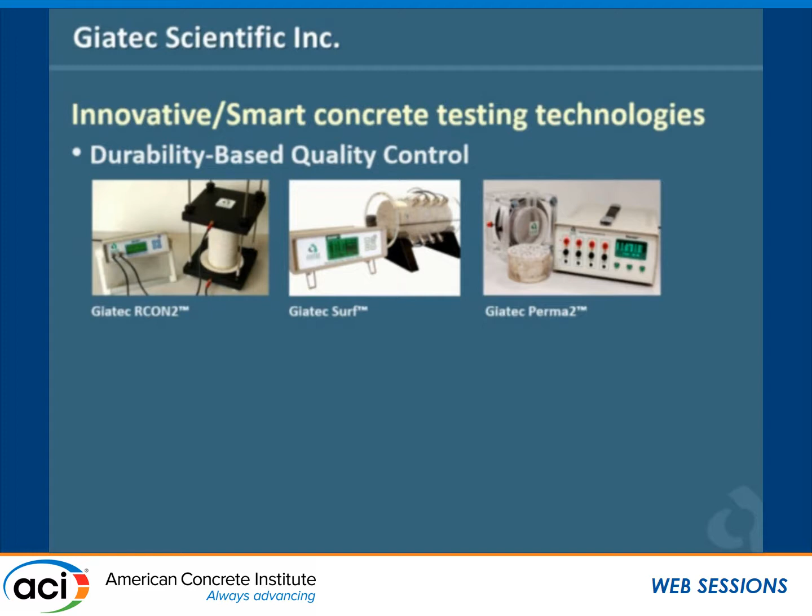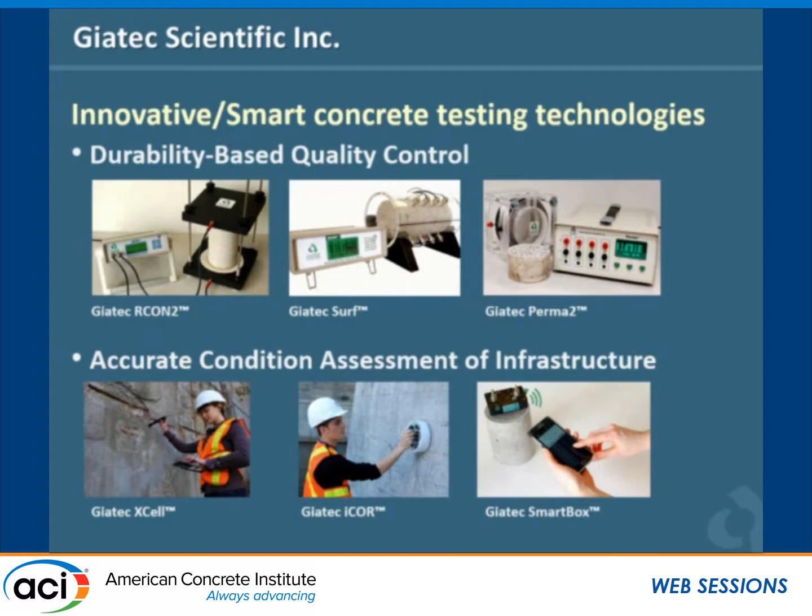And it's very archaic. Nowadays, with the advancements in mobile technologies, you can get much more powerful technology on a smartphone, better graphics, more accessibility, and more data communication. So with the second type of device that we developed, we focus on wireless communication between the measurement tool and the mobile app. So we started to develop mobile apps for corrosion detection and various types of activities, such as resistivity measurement. So essentially, we don't have any display on the unit, and everything is done and displayed on the mobile app. But the presentation is about on-site measurement of concrete properties, so I'll go into another application we're working on.

So by a raise of hands, how many of you have searched for concrete in Google Play or App Store? There's one. Okay, yeah. So if you search for just the keyword concrete, you'll find thousands of apps. There's literally thousands of apps on the App Store and Google Play. Anything from a concrete calculator, and I didn't know what a concrete calculator is until I downloaded one, and it's essentially a volume calculator. So any kid out of high school can do that, and then it estimates how many bags of concrete you need to put in that space.

And there are also apps, as you showed in the previous presentation, for simplified design of concrete elements. And there are also apps for general knowledge, like basic civil engineering concepts and definitions, dictionaries, and things like that. So this shows that it's so simple to develop applications and make them available to millions and millions of people worldwide. And so this is a tool that is available to leverage, and why not use it in the construction industry.

So our focus has been essentially on bringing mobile-based technologies, and we refer to them as IoT solutions. IoT stands for Internet of Things, and that's a very common keyword in the IT sector. Essentially, you want to connect everything together to the internet. So smart homes, smart TVs, smart fridges that can tweet what you need to do in the shopping, things like that. And we wanted to bring IoT applications to the construction sector. And the first focus was on compressive strength. So this is what I'm going to focus on in the presentation and show how we can leverage mobile technologies to monitor compressive strength of concrete in situ.

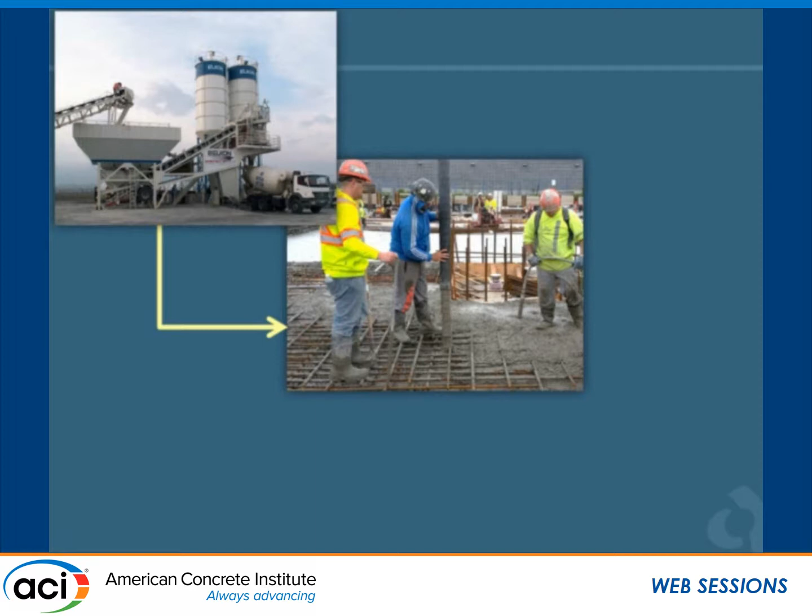So as you're familiar, the process of concrete construction involves bringing concrete to the job site using a ready-mix producer's truck, and pouring concrete. You take cylindrical specimens for general quality control, but you also have specimens that are cured in the field and sent to the lab for field-cured specimen strength measurement. And that has a very practical application, which is essentially formwork removal, application of load on the structure, opening traffic on a highway or concrete pavement, repairs, turning off the heat when you're doing element curing. So you send those specimens to the lab at 1 day, 2 days, 3 days, and then you wait for the results from the lab, and then you can make a decision on what you're going to do next.

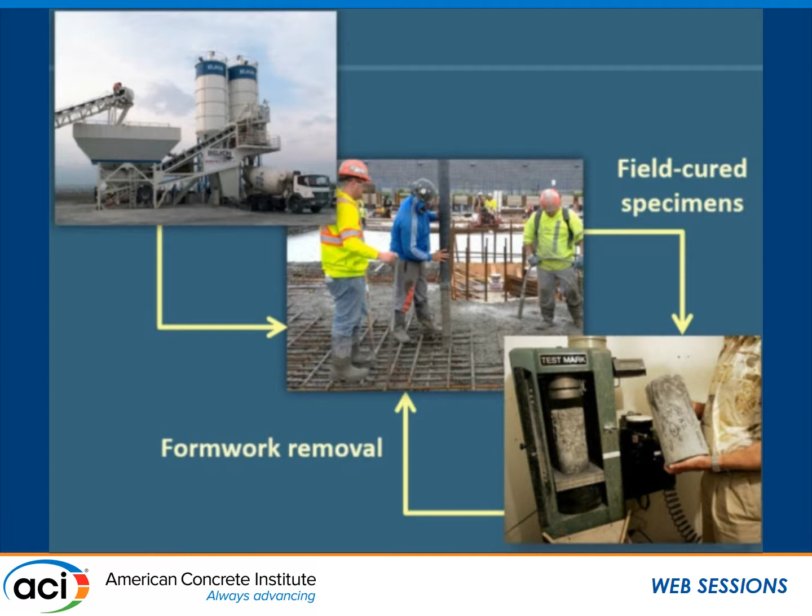So that's the process, and it's delayed, as you know, and it's not that accurate because you can't have that many field-cured specimens. So there are other non-destructive test methods, as you're familiar, such as the pull-out test and the Schmidt hammer, and those are not adopted that well because of the high variability of the results. So the most adopted technology out there for real-time concrete strength measurement is maturity. Maturity is standardized by ASTM, and it's been adopted by almost all the DOTs.

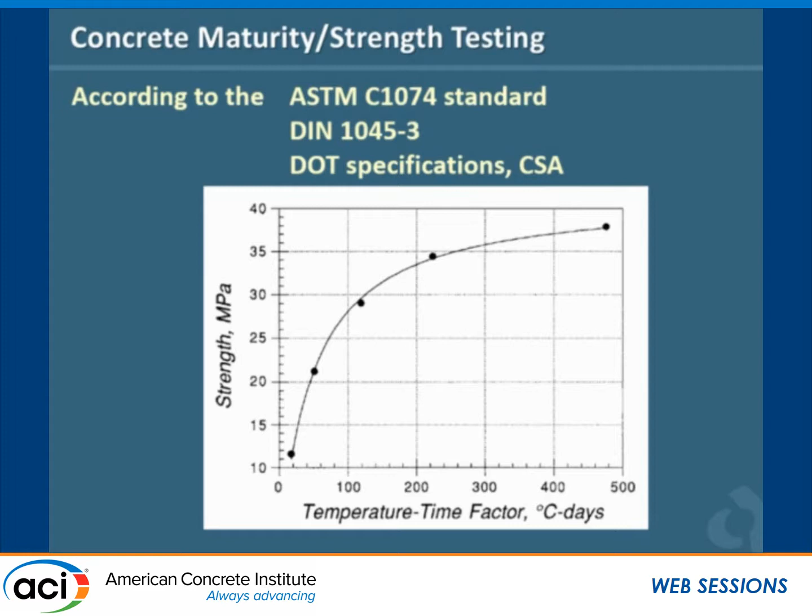It's part of the building code in Canada. It actually clearly states that you can either do the break test or you can do the maturity. So for maturity, you develop a calibration curve that essentially correlates between the temperature profile of concrete and the strengths of concrete at different days. And then use that pre-calibration curve, go on the field, monitor the temperature of the concrete in the field, and then you can estimate the strengths in real time.

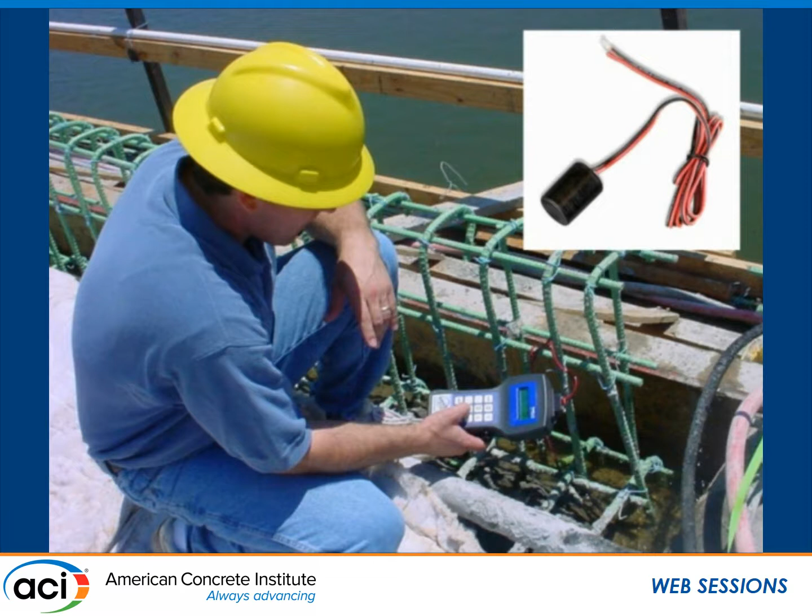The way that people do it is that you have thermocouples, temperature sensors, wire temperature sensors essentially, that you put in the concrete, take the wire out, and then at any point in time you go plug in your data logger to the wire to collect information. And then you have to sort of analyze the data to see on the curve where you are and then estimate the strengths.

So the process, as I said, is simple. Just place temperature sensors in the concrete, obtain data, which is essentially the temperature data. Then area underneath the temperature profile gives you the maturity index. And then from the calibration, you can see what is the strengths. There are two equations in the ASTM C1074 for maturity calculation. One is Nurse-Saul equation, one Arrhenius equation. There's a European standard for maturity, which is called weighted maturity, which is popular in Denmark, Netherlands, Scandinavian countries. So all in all, this gives us sort of an accurate measurement as a replacement of field-cured specimens to test.

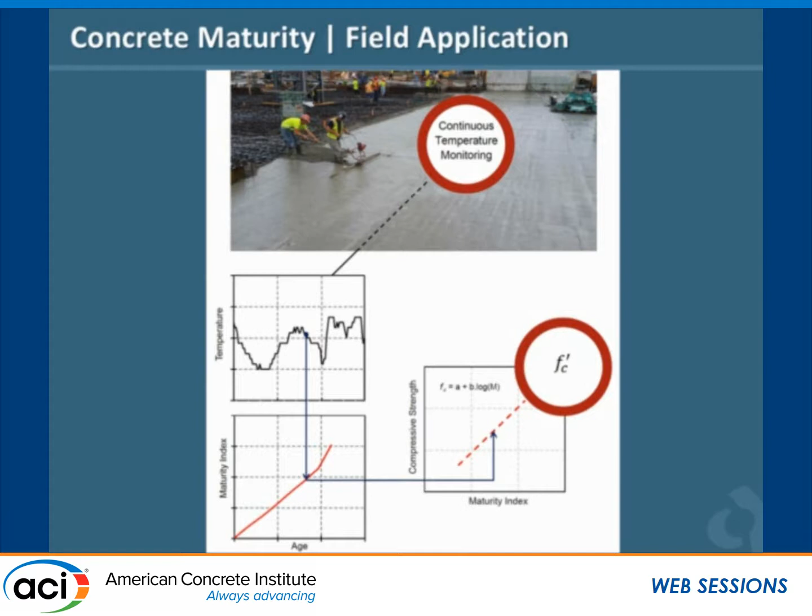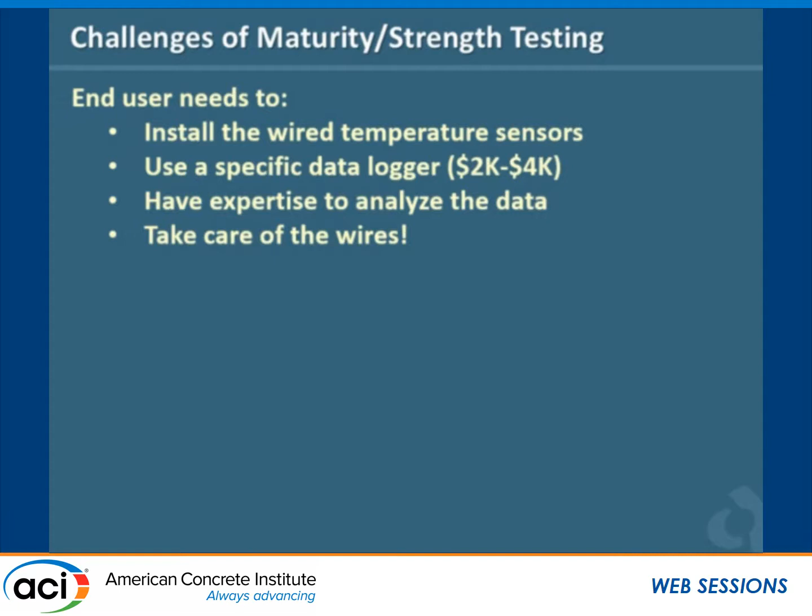But the challenge is that, well, you have to install these wired temperature sensors in place, then get a data logger, a clunky piece of equipment, monochrome LCD, and then have the expertise to analyze the data. And believe it or not, you have to take care of the wires. And with a lot of job sites you go and they say, oh, where's the wire? They cut it, it's a safety hazard. So because of all that hassle, people still go back to the break test. And so although it's labor intensive, although it's delayed results, and also it's not accurate, they prefer to do the field cured specimens, and I can't blame them.

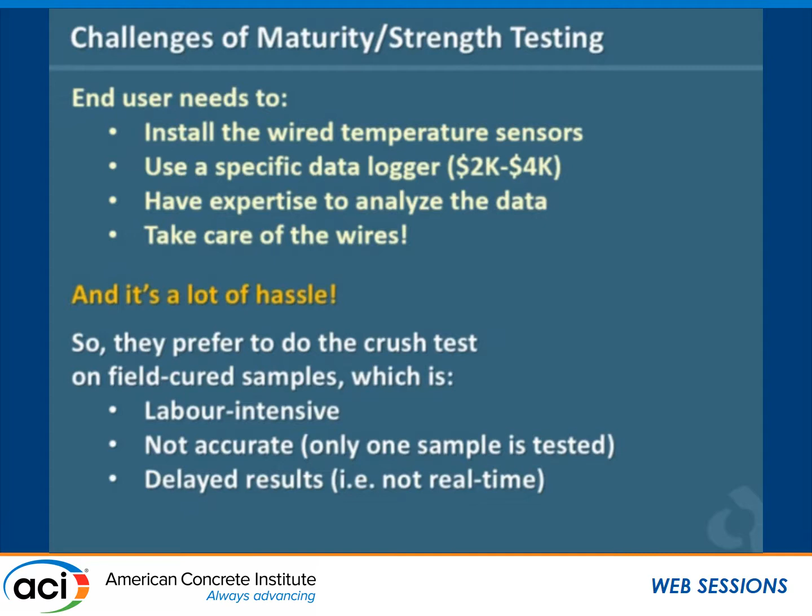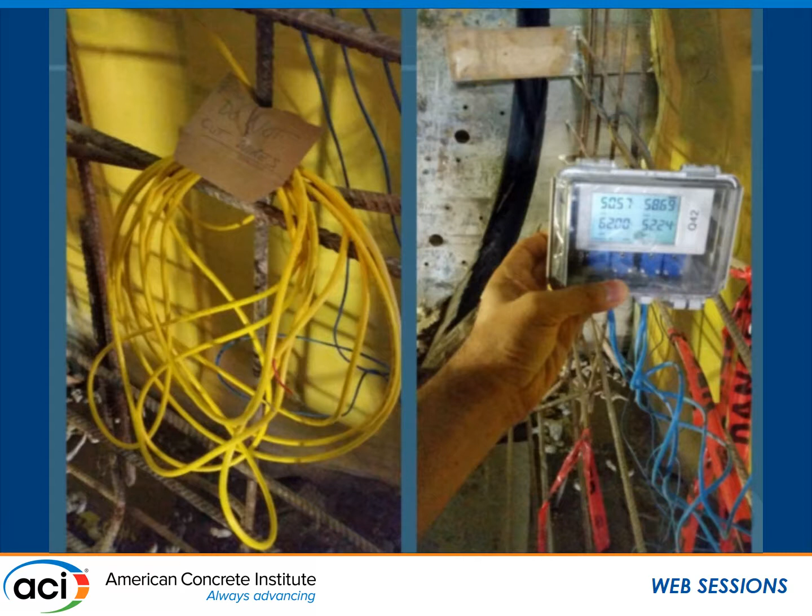So we thought, why not develop a solution that could replace all this, that could change all this? And it hasn't been possible until recently to do something like that using mobile technologies. One of the reasons was that electronics was not there. Bluetooth technology wasn't strong enough, and it was consuming more power. So it was only 2 years ago that we had low energy Bluetooth technology released to the market. And that enables us to run a sensor for a couple months on a coin battery. And on top of that, the signal is strong enough to go through concrete, although Bluetooth technology is designed for open air communication. But nowadays, the technology is cheaper and stronger, so we can leverage those technologies and get that communication from something that is fully embedded in the concrete.

So that's why I decided to develop wireless embedded sensors that are fully embedded in the concrete. So nothing is sticking out, everything is in the concrete, all the measurement is done there. And after that is simply a mobile app that you can use to communicate with a sensor. So everybody has a smartphone. You can have apps on Android and iOS platforms, and just walk up to the job site. There's nothing there that, again, you have to find and hook up your device to. Connect the sensor wirelessly to the app and download the data. Very, very simple.

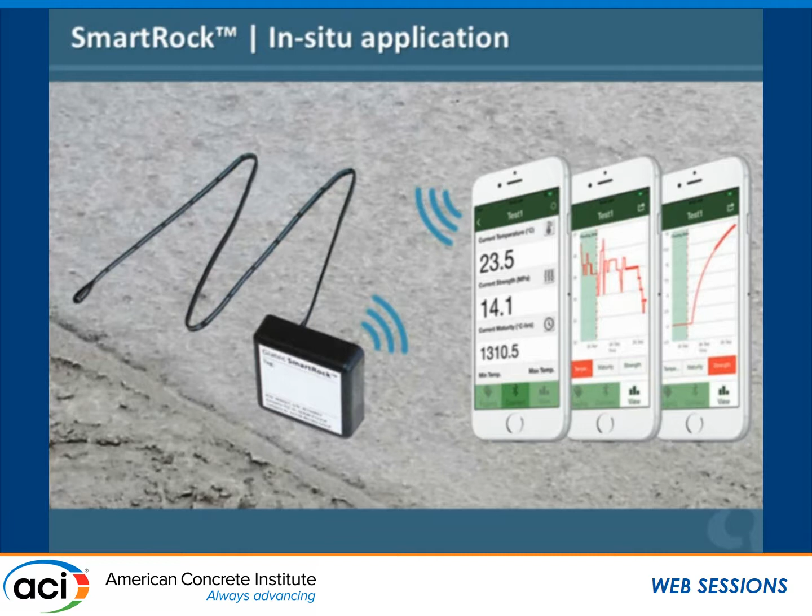So the way it works is that you essentially put the sensor in place. And again, these are Bluetooth technologies. There are wireless communication protocols that are much stronger than Bluetooth, so they can go through meters of concrete, like radio wave, but they're not practical for mobile-based applications. And the only communication that we have nowadays in mobile smartphones is Bluetooth, although we have near-field communication, NFC, but that's very, very close-range communication. So the closest we can leverage using mobile apps is Bluetooth.

So essentially, we have a Bluetooth transmitter here with a battery and memory and everything. And then you have wires that go anywhere within the slab. So you can install the transmitter near the surface to ensure that you have a strong signal coming out of concrete, and then put the wire as deep as you want.

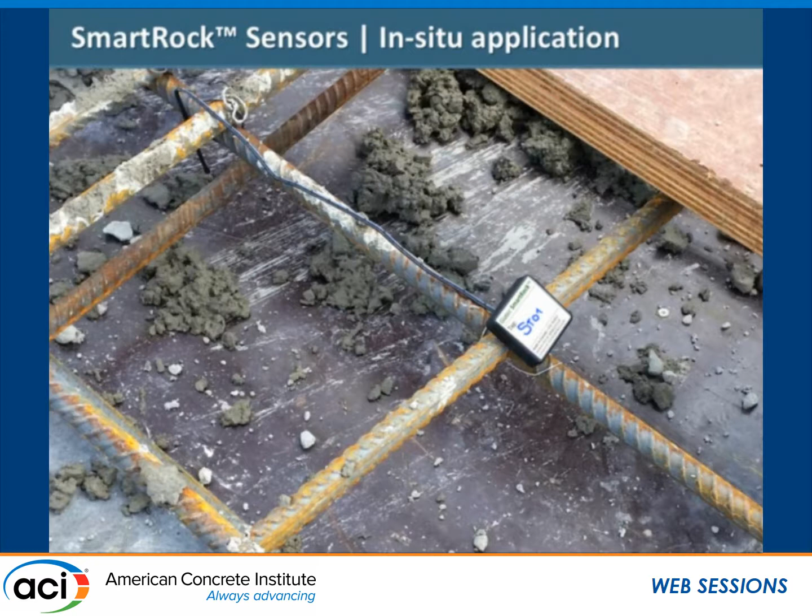Even in mass concrete, you can go as deep as a couple of meters, 5, 10 meters, and then have all the storage and communication through the main part of the sensor. And then you pour concrete as usual. It's very straightforward after that. Nothing is in the way of the construction workers, so they don't complain.

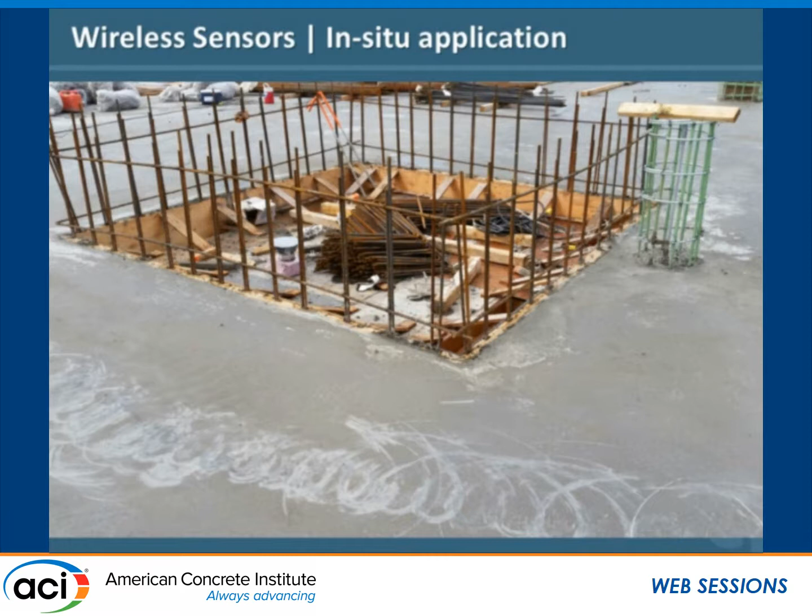How far away? The Bluetooth communication gets weaker and weaker as you put the sensor deeper. Within about 2 inches, you can get up to 8 meters of connection range. But if the Bluetooth sensor is in the open air, you can have 100, 150 meters of communication range. But 6, 8 meters is more than enough to just walk up on the slab and get connection to the sensor.

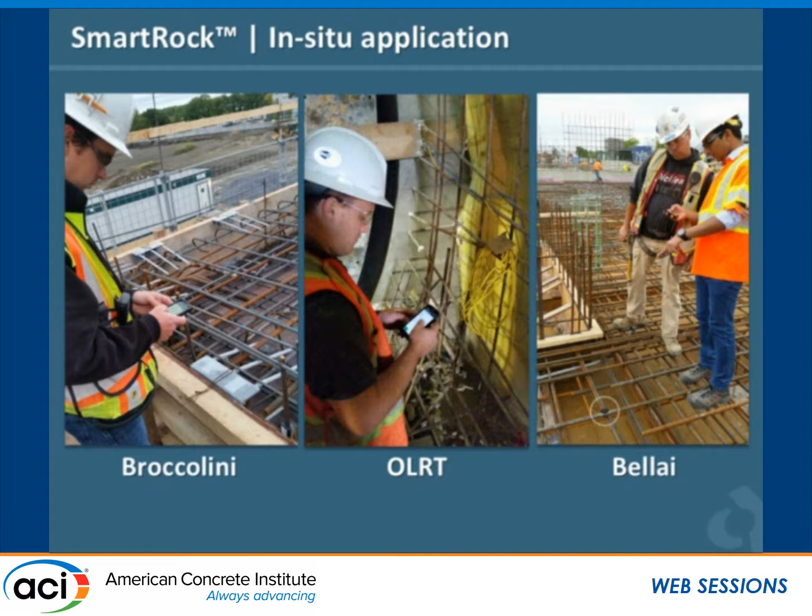And you will get a list of all the sensors that you have, and you'll be able to very conveniently and intuitively connect to all these sensors and make decisions on the go on whether to do the formwork stripping, stop heating the slabs, or open traffic, especially in fast-track projects. And you also have the profile of temperature and profile of strength. And as the previous presenter presented, you can easily share this. The shareability using mobile apps is impressive. You can email it right away, put it in Dropbox, and your coworkers can make a decision as well on what they're going to do next.

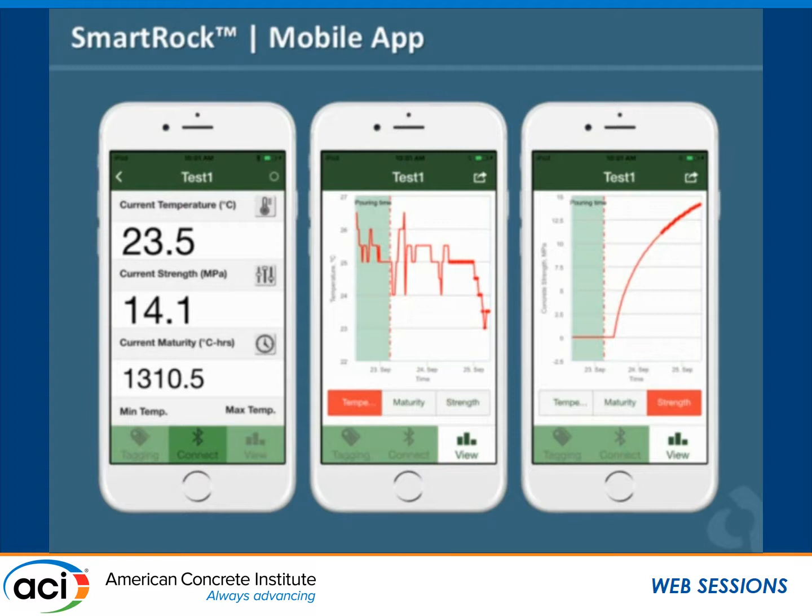So we took this one step further to develop a smart concrete: embedding the sensor in the truck instead of in the slab. The sensors are pre-calibrated with the maturity curves, placed in the truck, and the truck delivers a smart concrete to the job site. So the end users don't really have to do anything. They simply download the app, connect to the sensor, and they can see the strengths when the concrete is placed on the job site. This makes the whole practice very seamless.

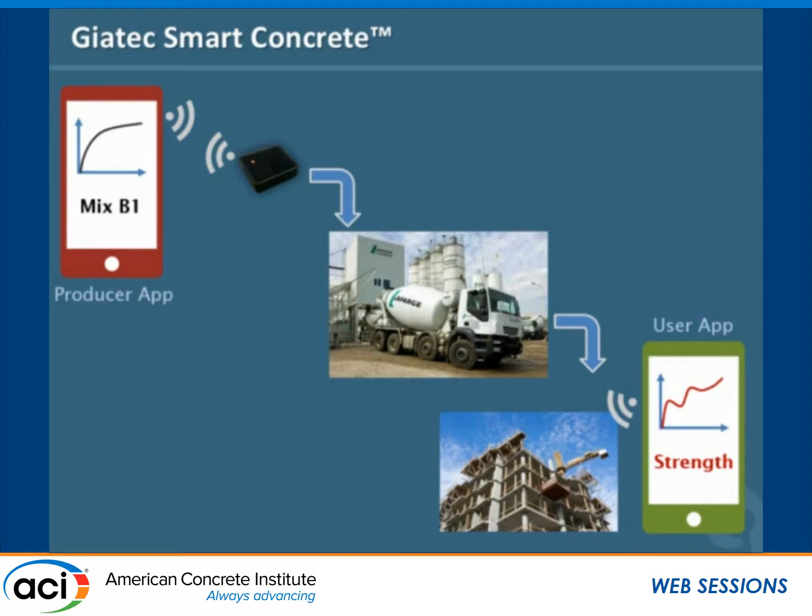And it's essentially because we have mobile technology that makes it possible. It wasn't possible before. So that's the smart concrete that is also part of the smart technologies available nowadays. And it's very easy at the batching plant when they want to send the truck off to the job site. They just put the sensor in it and assign the calibration on the sensor, so the end user doesn't even know what calibration that sensor has, and just sees the real-time strength.

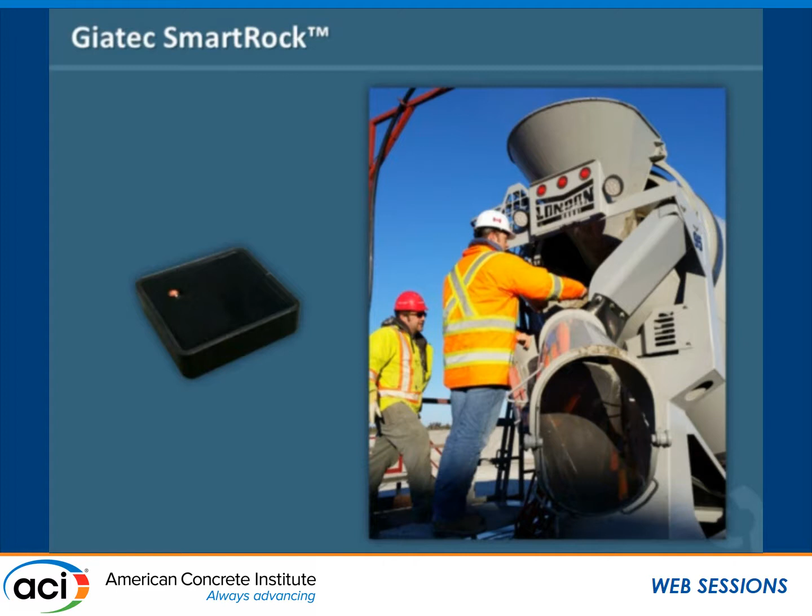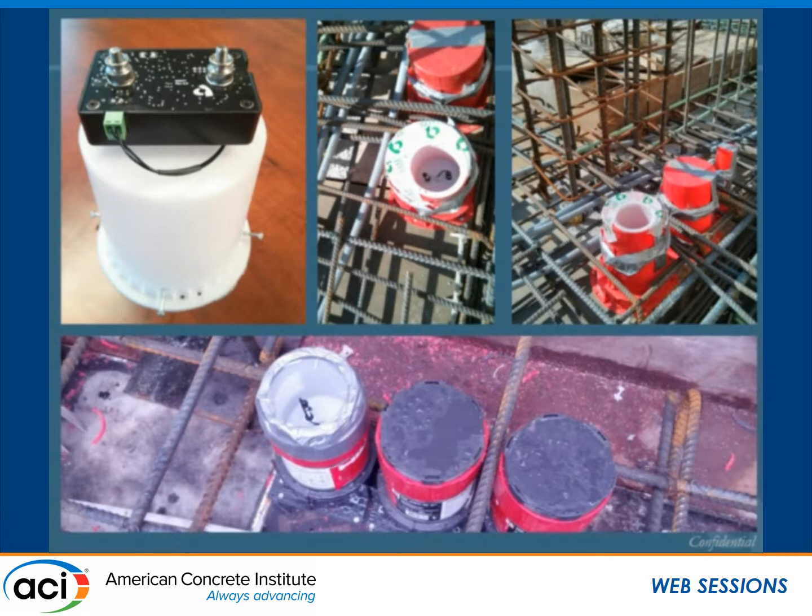And the other technologies that I showed you earlier, like resistivity and other permeability assessment technologies, can also be combined into in-situ measurement technologies. This is a small resistivity box. It measures the electrical resistivity of concrete as well as temperature. You can place it in the sample, essentially a plastic mold, and put it on the job site, and when you pour concrete, it is filled with concrete. It measures the change in electrical resistivity of concrete from the fresh stage up to the hardened stage and after that. Then, the same concept, you walk up with your mobile phone, connect to the sensor, and download the resistivity and temperature information.

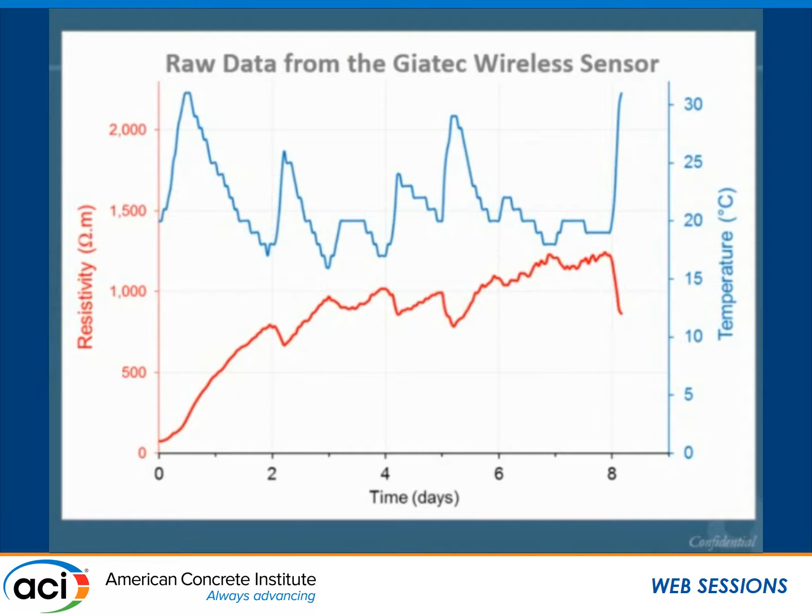There have been recent studies at NIST and by other researchers that show that resistivity can be correlated to setting time, which is very ideal for finishers. They can decide when to do finishing based on that. And also permeability and water content. There was research out of Berkeley by Paulo Monteiro correlating resistivity to water-cement ratio. These technologies have been developed over the years, and nowadays it's possible to use mobile solutions to make them accessible and easy to use on a job site. Using this technology, you can get resistivity and temperature information, and even develop equations and calibrations to estimate the strengths based on other parameters.

So all in all, you can have sensors, mobile-based applications to monitor properties of concrete from the fresh stage to pouring to finishing and while the structure is in service. And if one day we can resolve the battery issue, because these are limited battery powers, so we can run a couple months, maybe maximum 2 years, depending on the battery size. But if you want to do long-term monitoring with these embedded sensors, we're not there yet.

But the IT industry and the electronic industry is advancing so fast that I have no doubt that within a few years we'll be there. And so it's really phenomenal what's going on in that industry, and we have to bring all the solutions that are there and make them possible and applicable to practical solutions in the concrete sector.

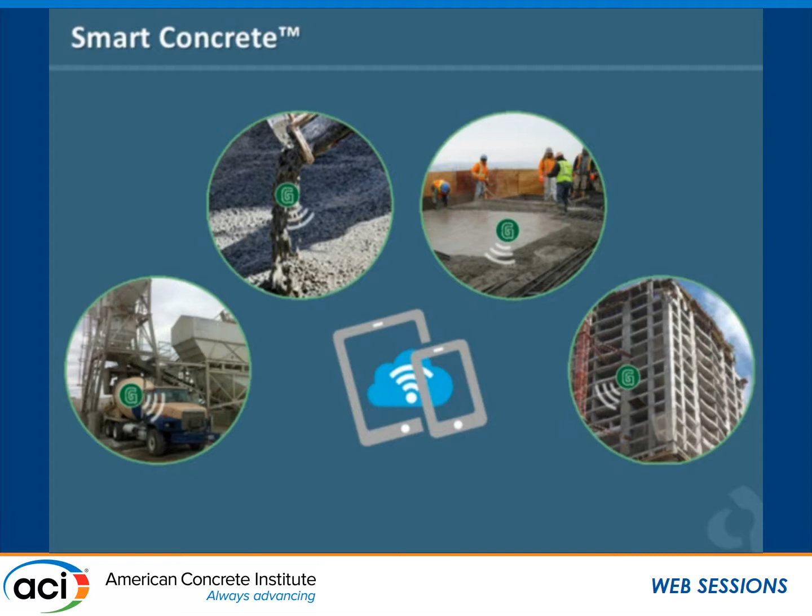To put them together in one location was one of the goals that we had developing the Concrete Hub mobile app. So essentially we had like 6 sections in the app, from videos, news, encyclopedia, tools, blogs, calculators, to have all of them in one place so that students, concrete professionals, everybody who's interested can get everything in one place, be able to download it and use it. So that's it for my presentation. If you have any questions, I'll be happy to answer.

The maturity, the thing I know is maturity verification or the battery life. I mean, usually maturity you don't need to have it that long. So you're saying 3 months may be all you have to monitor it for, so you can put in a lesser battery, or the battery should last 2 years? Yeah, the coin battery, a small 3-volt coin battery, lasts for about 4 months on this technology. So most of your products, what is the goal of the maturity for your target?

Only the first few weeks. Like, people are only concerned with the first few weeks. Even out to the 90 days and trying to make sure you tested with your breaks if you need to make cylinders as well, so your data is comparable. Yeah. Sure. So the only application, or the most important application, is formwork removal, and they're only doing it within the first few days or week. So it's more than enough for them to have 4 months of battery.